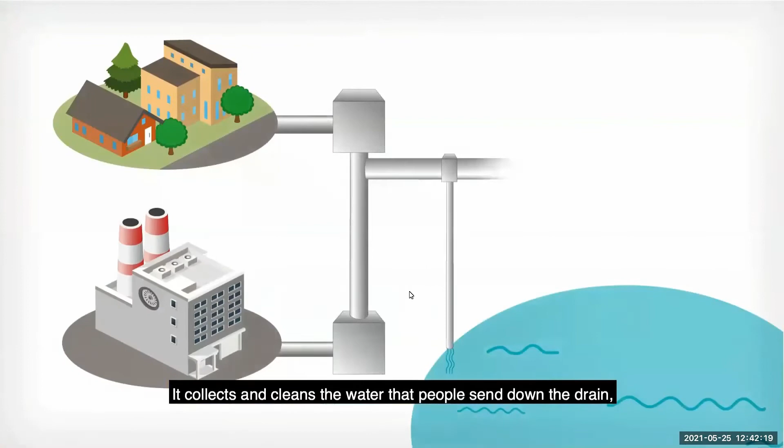Clean water is what makes the Northwest special. Puget Sound and our lakes, rivers, and streams give us food, transportation, jobs, and fun. Why should you care about wastewater in our region? King County's wastewater system is vital to our community. It collects and cleans the water that people send down the drain and protects public health in our rivers, lakes, and Puget Sound. The Clean Water Plan will guide King County investments that protect our waterways, the environment, and public health for decades to come.

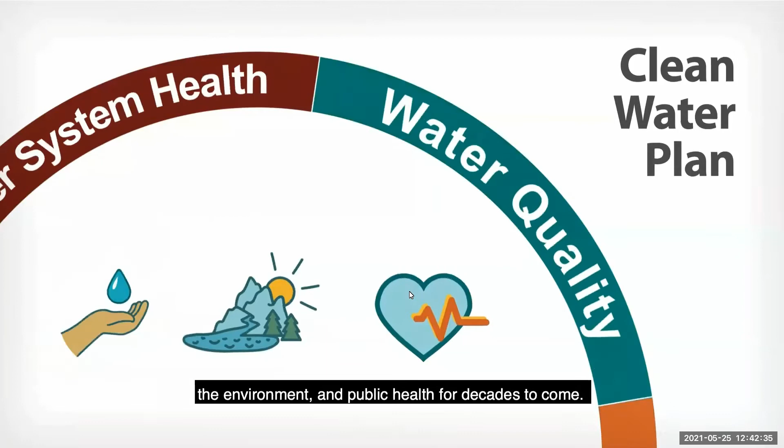King County has tough decisions to make about the future of our regional wastewater system. We need to plan for current and proposed regulations, fixing aging pipes, pumps, and tanks, population growth, and how to pay for the investments which will cost billions of dollars in the coming decades. While doing this, we need to keep other important issues like equity and social justice, our future climate, and costs in mind. And your voice matters. The Clean Water Plan process will allow us to thoughtfully navigate the different choices and opportunities so we make the right investments at the right time for public health and the region's rivers, lakes, and Puget Sound going forward.

Here's how the planning process works and how you can make your voice heard about the issues that matter to you. First, we look at different choices and opportunities that need attention across our wastewater system. Things like how we move wastewater to the treatment plants, how we clean it when it gets there, how we manage extra water during wet weather, how we care for our aging system, how we recycle treated wastewater, how we clean up historical pollution, and keep new pollutants out of our wastewater.

To build the Clean Water Plan, we are exploring a range of actions to address our wastewater and water quality challenges. Actions are the moldable building blocks that will be shaped and combined through the planning process. Understanding individual actions is a start, but we also need to look at how they interact over time and how they affect water quality. The next step in the Clean Water Plan process is to put individual actions together into strategies, which are different complete approaches to investing in water quality and our regional wastewater system. We developed several strategies that will help us explore the choices, opportunities, challenges, and results of each approach.

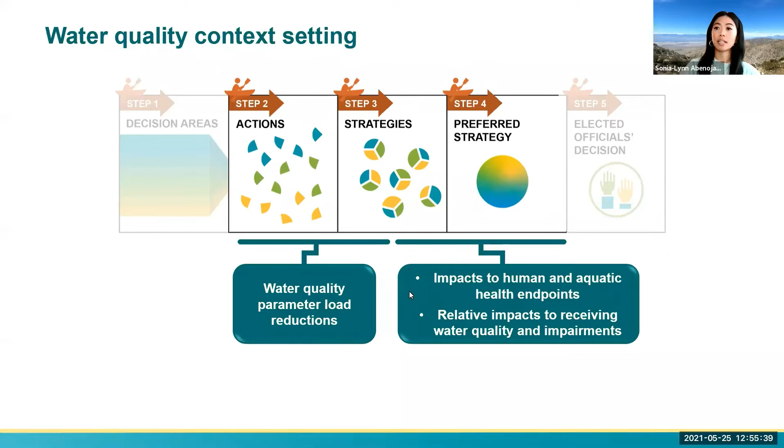In future phases of the Clean Water Plan process, we'll put together individual actions into complete strategies, and at that point we'll be able to explore the broader impact that the strategies have on water quality, which includes benefits to salmon, people, and orcas.

This brings us to our next topic, which is how water quality parameter loads are estimated for the plan. Estimates of water quality parameter load reductions were determined by developing estimates of concentration and flow rates. For the decision areas we'll be discussing today, which are the wet weather and legacy pollution actions, this included historical data of stormwater and wet weather flows, regional water quality monitoring data, and other available literature.

Based on specific components, activities, or projects within an action, we determined the changed conditions such as changes in populations or removal observed at similar facilities, and we use this to estimate potential change in water quality parameter loads.

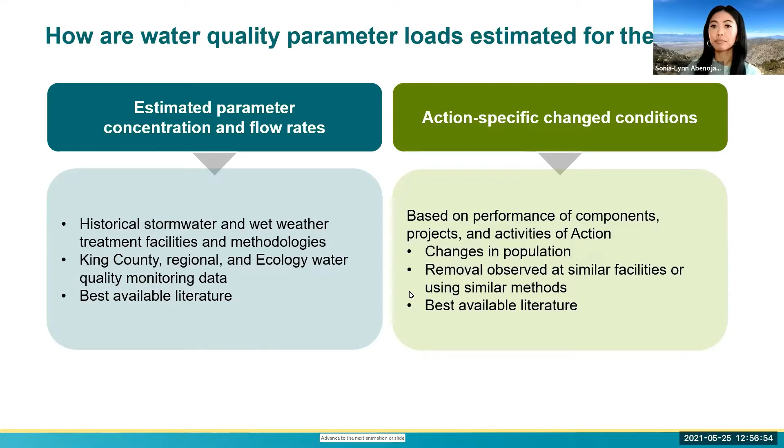Later in this workshop, you'll learn more about the conceptual program planning estimates of each of the actions. But we want to share up front how these estimates of the specific components, projects, or activities of these actions were developed. We used costs from existing King County studies and historical cost revenues, standard labor rates, and information from comparable programs or projects in other areas of the United States.

Estimates that we'll be showing you today are for the full 40-year planning horizon, and they're shown with an accuracy range from the lowest, most optimistic, to plus 150%. These estimates are based on guidance provided by the Association for the Advancement of Cost Engineering. In addition, to account for the uncertainty in the cost estimating of a planning level concept, we also looked at how the scope and details could be impacted over the 40-year planning horizon.

The purpose of these conceptual programs, as I mentioned earlier, is to provide an understanding of the order of magnitude of funding that would be needed for the action if implemented.

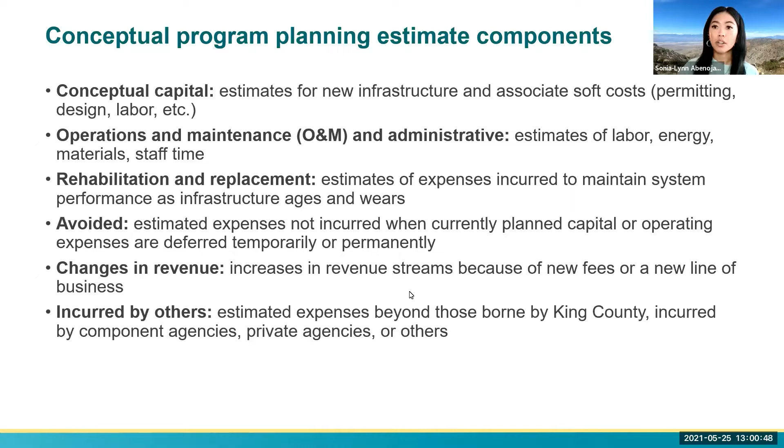All right, so now that I've walked through the background information on the Clean Water Plan and the actions, I'm going to pass it back to Darcy, who will show you where we are on the agenda and pop up another few polls for all of you to participate in. Thank you. Thanks very much, Sonia.

On this slide, you can see that we are moving along through our agenda into our next topic. We'll head next into our presentation on stormwater management key concepts. Next slide.

Next slide. To start this question off, we do have a couple more quick trivia questions for you. To launch this, just for fun, pick the option you think is closest to the correct answer. So approximately how many inches of rain fall on average in King County every year? 24 inches, 39 inches, 41 inches, or 56 inches?

We definitely know we are in a rainy part of the world. Thanks for entering in your guesses. Looks like a little over half of you guessed the right answer. It is 39 inches. All right, thanks.

Okay, next slide. Here's one more quick question to warm us up for the next presentation. Approximately what percent of King County's urban areas is impervious surface, meaning land that is covered by features that cannot absorb water? Is it 21%, 27%, 35%, or 44%?

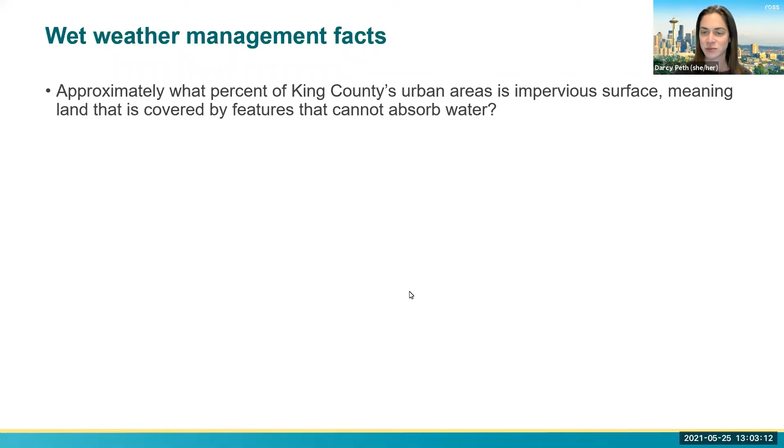Okay, with that, we are now going to go into the presentation. I'll hand it over to Tiffany Knapp. Go ahead, Tiffany. Thank you, Darcy, and good afternoon, everyone. Welcome again, and thank you for your time today and for being here. I am Tiffany Knapp. I am from the King County Wastewater Treatment Division and one of the program managers for the Clean Water Plan.

So to kick off this section, we're going to do a quick grounding on what we're talking about when we say stormwater. We'll start with a short reminder of the hydrologic cycle, or the water cycle. Basically, when precipitation, rain or snow, falls on land, it either falls onto water surfaces, so oceans, rivers, lakes, or it falls onto vegetation, trees, grasses, bushes, and from those it either evaporates or evapotranspirates back into the atmosphere.

Or it can land on ground surfaces where it can evaporate or infiltrate into the ground if the ground is pervious, so the water can actually be absorbed. Or from impervious surfaces, or hard or developed surfaces, rain will run off the surface either directly into water bodies or into a stormwater collection system, which could be pipes or open ditches.

So when we think about water quality, especially in the urban environment, we are most focused on this rainwater runoff that enters into these collection systems. So that's what we'll mostly be talking about today.

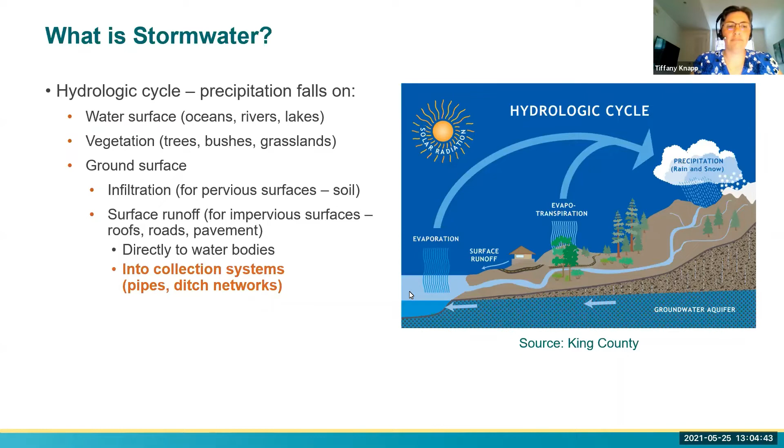So why are we concerned about stormwater in the urban environment? In urban areas, there are more hard impermeable surfaces, as noted in that poll question, which means more stormwater runoff than would naturally occur in those areas. So rather than the water slowing down as it moves through vegetation or being able to infiltrate into the ground, the stormwater runs directly off these hard surfaces and it can cause higher peak flows.

These higher flows can also carry pollutants from the surfaces that they run off to, which includes a wide range of pollutants. So we're thinking of things like solids, metals, oils, bacteria, as well as garbage and other contaminants that might be on roads or pavements that it is running off of.

Also, these high peak flows can damage stream channels as more water gets into the streams faster, causing them to flow faster and more violently. This then can impact habitat within the streams, including habitat that's good for fish spawning, for instance. So this is not just aquatic and environmental impacts, but these higher stormwater flows can also impact people, things such as flooding or other impacts as well.

Each year, King County experiences large volumes of stormwater runoff. Regionally, it's estimated that approximately 146 billion gallons of stormwater runs off the approximately 540 or so square miles of developed land, and that stormwater then enters the region's lakes, rivers, and Puget Sound. Following along on the slide image, some of that 146 billion gallons enters the regional wastewater system, about 12 billion gallons, which is then treated by the wastewater treatment plants. Another 15 or so billion gallons is treated by stormwater-specific treatment facilities, but that leaves approximately 118 billion gallons that drains directly into surface waters with no treatment. To give you a sense of scale, that 118 billion gallons is almost double the amount of flow, wastewater and stormwater, treated each year by King County's regional wastewater facilities.

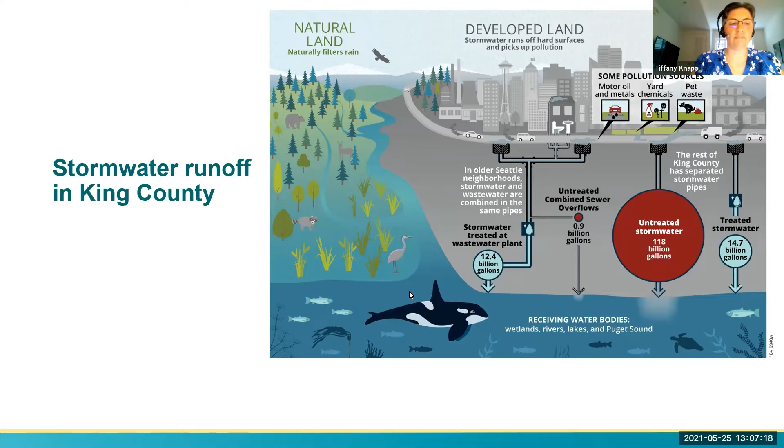Let's break down for a minute what types of systems collect stormwater in the urban environment as it runs off of the roofs and pavements and roads around our region. There are basically 3 different types of collection systems. The first, shown on the slide, is the separated storm system.

This is where there are separate pipe systems for both wastewater and stormwater—one system for wastewater, one system for stormwater. This is most of the urban area of King County. The only area that doesn't have a separated storm system is Seattle. So most of the stormwater, that 118 billion gallons from the previous slide, goes into these separated pipes and ditches and runs directly into surface water. A relatively small amount, the 15 billion gallons on the previous slide, gets treated on site or at a stormwater-specific treatment facility.

In Seattle, there is a combined sewer system where the runoff from stormwater goes into large pipes along with the wastewater. The stormwater mixes with wastewater and travels to one of the regional wastewater treatment plants, primarily to the West Point treatment plant, where it's treated before it is discharged to Puget Sound. These pipes are big enough to carry the stormwater from small and medium and even some big storms, and this accounts for about 12 billion gallons of the stormwater each year.

During very large storms, as Sonia mentioned, in the winter when the combined system gets full, there is a small percentage of the overall flow that overflows into surface waters through combined sewer overflow outfalls. We'll be talking more about our combined system and actions related to it in the next segment today after our first break.

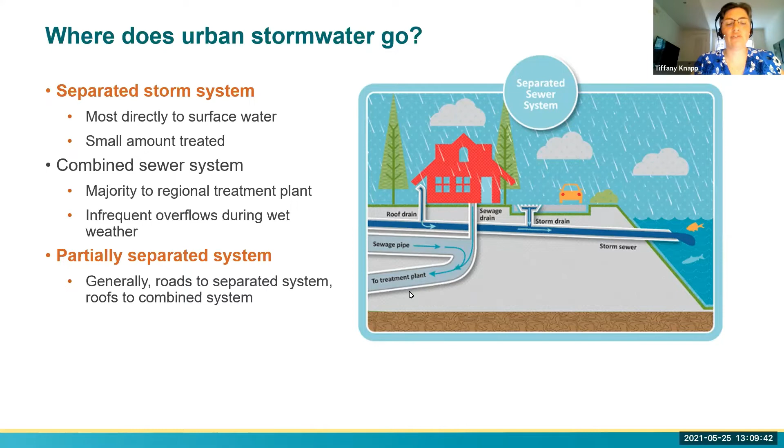There's also some areas that are partially separated, meaning some stormwater goes into stormwater pipes or ditches, and some stormwater goes into the combined system. In these areas, generally the runoff from roads will go into a separated storm system, and the runoff from roofs or parcels and other surfaces goes into the combined system. So when we talk about the Clean Water Plan stormwater management related actions today, we're generally talking about stormwater management in the separated storm systems and in the partially separated systems.

I mentioned a couple times that some stormwater does get treated. So what does that stormwater treatment look like? This slide shows a range of stormwater treatment—these are also the different types of treatment we'll be speaking to within the stormwater management actions.

On the left is smaller scale, tending to be more passive treatment that can be appropriate for more distributed, smaller areas—roadways or right-of-ways, parking strips, homes or individual parcels, parking lots, those types of areas. This includes things like bioretention, stormwater ponds, media filters, rain gardens, and permeable pavement. Often these are called green stormwater infrastructure, or GSI.

The middle picture shows a regional stormwater treatment system that captures and treats a larger volume of stormwater, and these systems can be either passive or active. And then, as I mentioned, a large amount of the stormwater that is treated in the region enters the combined system and then flows to one of the regional wastewater treatment plants. On the right is the West Point treatment plant, located at the tip of the Magnolia neighborhood in Discovery Park in Seattle.

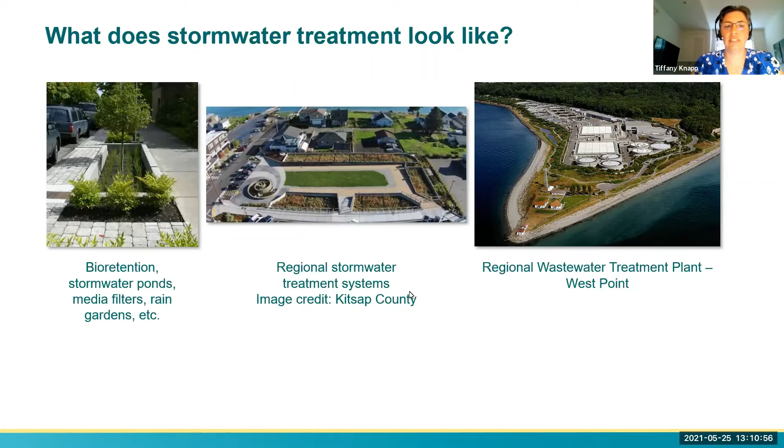In King County, stormwater is managed by multiple jurisdictions, and there are federal and local stormwater regulations that require local governments to reduce the amount of pollution in stormwater, as well as the volume of stormwater.

There are also recent stormwater codes that require stormwater management for new and redeveloped construction. For example, the image on the right shows green stormwater infrastructure for a newly constructed multi-family housing unit. These newer codes only require stormwater facilities for new and redeveloped areas, not for older buildings or areas developed prior to when the codes were initiated.

In urban areas, cities are responsible for stormwater management within their boundaries, and King County operates stormwater management infrastructure and programs for unincorporated areas of the county.

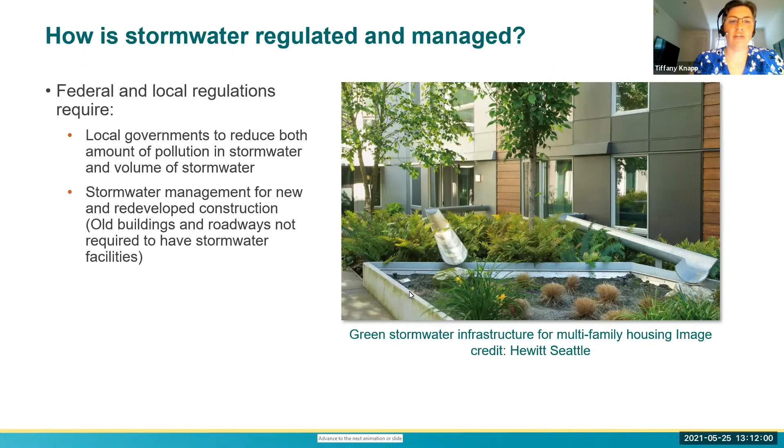So why is the Clean Water Plan exploring wet weather management and specifically stormwater management related actions? The next slide gives us a sense of that exploration. Overall, when looking at what approach should be taken to address wet weather in King County's system, we're also considering whether there are new or alternate approaches to wet weather management.

Should these be considered in certain areas, for instance? This could include how more polluted stormwater could be treated through both existing and new approaches and tools, including gray infrastructure as well as green infrastructure.

We're also exploring whether there are opportunities for and the ability of the wastewater system to treat more polluted stormwater. And since we know stormwater is a major source of pollution in the region's water bodies, we're exploring if there are opportunities for better water quality outcomes.

Related to this, we know that many older buildings and roadways were constructed prior to the current stormwater requirements, and that they lack sufficient stormwater facilities. We also know that stormwater is a major source of pollution in the region's lakes, rivers, and Puget Sound.

Also, existing stormwater regulatory mechanisms and codes will likely result in incremental stormwater management improvements that occur over a longer period of time. And we also know that stormwater flows and watersheds don't follow city or jurisdictional boundaries.

So there is some coordination between stormwater management agencies that exist, but there are also likely more opportunities for partnerships and coordination.

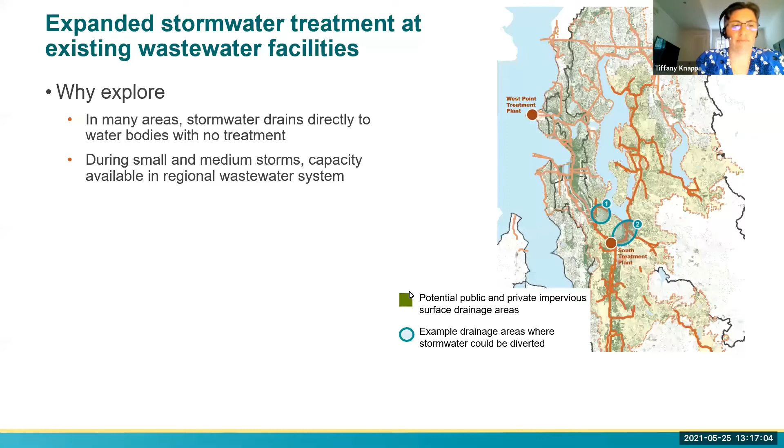This action gives you a sense of what this would look like. We would connect the separated stormwater systems to the regional wastewater system during small storm events, then stop that diversion during higher peak flow periods when capacity is needed for wastewater flows. This would target areas with separated stormwater collection where stormwater is not currently treated, and where those systems are close enough to existing county regional wastewater pipes or infrastructure so that not a lot of new infrastructure would need to be built.

The map on the right shows one of the example areas. In this figure, several areas are shown, some that currently have stormwater draining to Lake Washington, shown in yellow, and others where stormwater drains to the Duwamish River, shown in green. Again, all of those areas are currently without treatment.

The blue dots show potential interface points between the existing stormwater system and where we could potentially divert to the wastewater system. This action would consider where capacity is needed in the King County wastewater system for larger storms, and include gates or valves that shut off stormwater diversion when the wastewater pipes are filled. We estimate, as an example, that approximately the 90th percentile stormwater flow event in these areas could be managed this way, which roughly corresponds to a storm producing about 1.5 inches of rain in a 24-hour period.

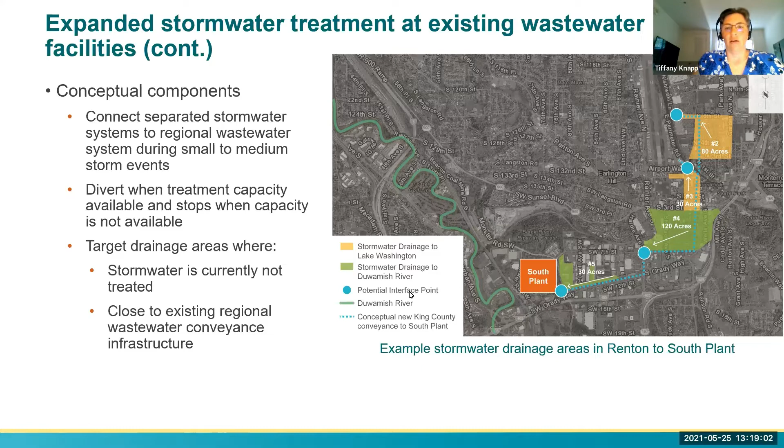Looking at the characterization of this action, we have information on water quality. We see a reduction in stormwater flows, and since there's a wide range of pollutants in stormwater, we see a reduction in pollutants as well. It also shifts any resulting loads from the Duwamish or Lake Washington to Puget Sound instead, since the flow now goes through the regional wastewater plant and the treated effluent is discharged directly to Puget Sound.

The conceptual program developed for this action results in about $210 to $530 million for capital infrastructure to connect the systems, plus an additional $20 to $50 million for administrative and operation and maintenance over the 40-year planning horizon. This action is somewhat scalable, and there may be other areas of the regional wastewater system with some capacity during small and medium-sized storm events. However, there's a practical limitation to how much we could scale this up, given the size of existing wastewater pipes and capacity available at the treatment plants.

We would need to study this further and identify and confirm specific project locations that would make the most sense if this action were implemented. Once again, this concept uses capacity that's available when not needed elsewhere—we're not planning on expanding pipes or treatment plants to treat more stormwater, but really taking advantage of available capacity. Finally, there are also opportunities for partnerships and collaboration between jurisdictions for both implementation and potentially cost sharing with this action.

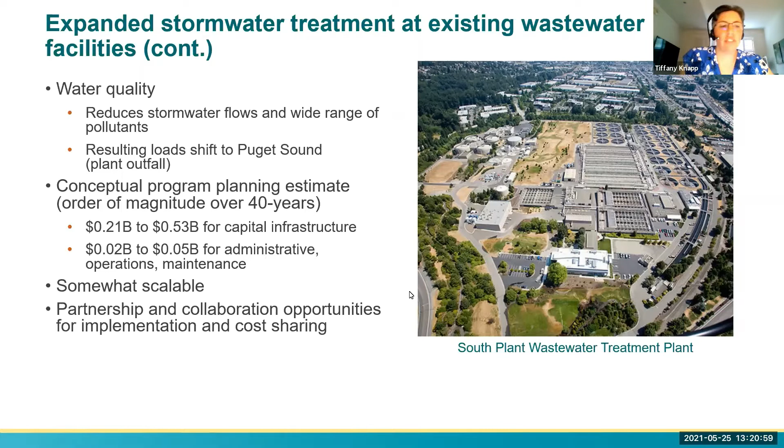So our second action is the Regional Stormwater Facilities Program. This action looks to address stormwater that's not currently treated, and it explores leaning into more distributed stormwater treatment infrastructure, which we know has the potential to reduce pollutants. This action includes new stormwater management infrastructure in areas that currently lack stormwater management and treatment, and would include regional stormwater facilities and green stormwater infrastructure, focused on public land or the right-of-way.

So the figure to the right shows some of the potential example areas considered for this action. Regional stormwater facilities are the blue circles, and more distributed green stormwater infrastructure, GSI, and retrofits are the orange circles.

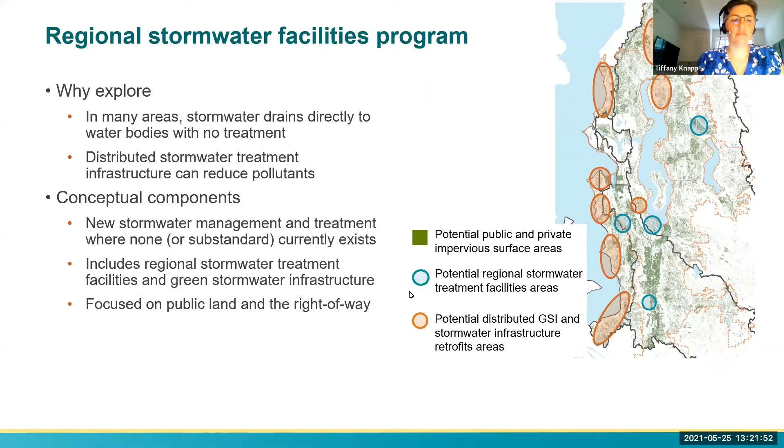From a water quality perspective, this action reduces stormwater flows and a wide range of pollutants by 50% or more. For example, depending on the specific stormwater controls and treatment used, up to 90% of solids and toxics could be removed before they enter water bodies, or up to 70% of metals and bacteria. Pollutant reduction here accounts for both flow and volume reduction.

One of the things about this action is it's scalable and could be geographically flexible in where it's applied. This could allow for targeted programs to specific water bodies, specific ecological outcomes, or incorporating equity considerations about where to apply the action. Partnerships and collaboration would be important for implementation, and there are opportunities for cost sharing with this action.

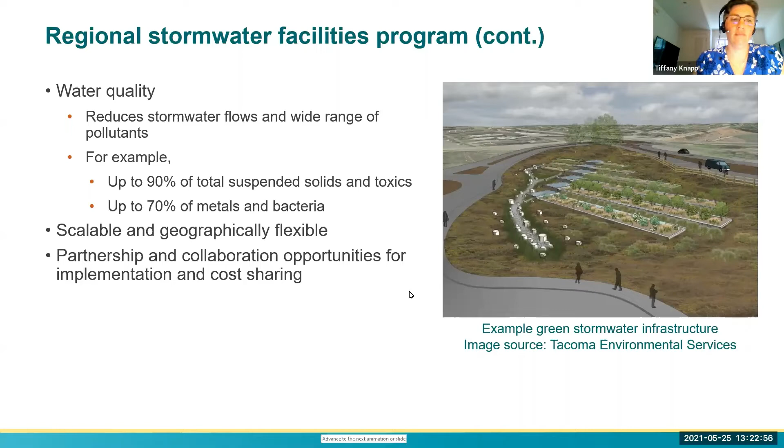The third action within these stormwater related actions looks at where stormwater flows into regional water bodies without treatment, where there's currently no requirement for adding stormwater facilities. It also explores managing that stormwater closer to the source. This action focused on areas developed before the recent stormwater codes and would provide an incentive program for stormwater retrofits on private property, like rain gardens, bioretention, permeable pavement, cisterns, and similar tools.

In this case, construction and maintenance would be the responsibility of the property owner, but they'd be provided a financial incentive to install these retrofits. This would help manage stormwater at its source and create partnerships with property owners for installation and maintenance of smaller scale stormwater management. The map shows in green broadly the areas that would be technically feasible, though specific project locations would depend on the voluntary nature of which property owners decide to participate in this incentive program.

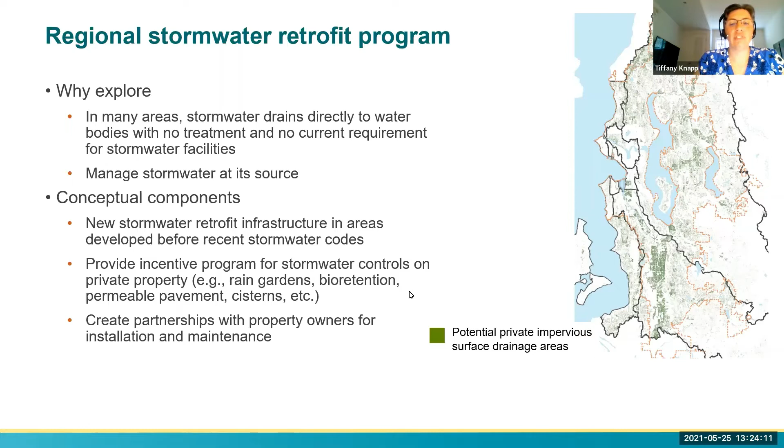From a water quality perspective, this action is similar to the previous one. It does reduce stormwater flows and a wide range of pollutants. For example, depending on the stormwater controls and treatment, around 90% of solids or toxics are removed before entering water bodies, or up to 70% of metals and bacteria.

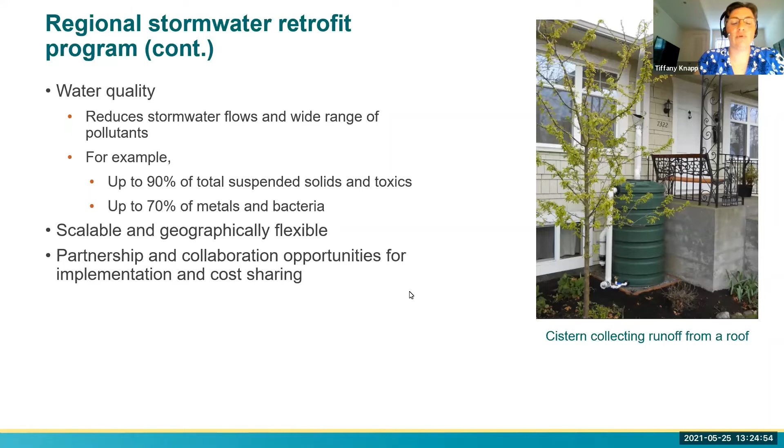Implementation of this program is also very scalable and geographically flexible, again targeted to specific water bodies, ecological outcomes, or equity considerations. Partnerships and collaboration would be very important for implementation, and there are also opportunities for cost sharing.

So those are the 3 stormwater management related actions. Just to offer some overall takeaways: stormwater is a major source of pollution to the region's lakes, rivers, and Puget Sound, and we know that stormwater management options are able to reduce a wide range of pollutants and volume of stormwater. Stormwater actions also tend to be very versatile, and they can be implemented at different scales, in different areas, and on shorter or longer timelines. This really does offer geographical flexibility that allows for the potential to target specific water bodies or specific ecological outcomes, as well as to consider equity in where these programs are implemented.

Speaking of equity, as the Clean Water Plan has developed and characterized the actions, we've also looked at where opportunities may exist to incorporate equity. Several examples are on this slide; there are actually more listed, which can be found in section 9.2 of the Actions Characterizing Water Quality Investment Options document. For stormwater management related actions, here are a couple of these equity opportunities.

Equity opportunities might exist to support contracting, priority hire, workforce development, and apprenticeships. For example, workforce development for maintenance of GSI, the green stormwater infrastructure, could target people in priority communities who could participate in county-sponsored training programs. There are currently existing county processes in this area, but with these actions there's an opportunity for new programs and additional resources. It's also an opportunity for equitable service delivery of stormwater treatment that targets priority communities, such as prioritizing future system improvements for specific water bodies in priority areas like the Duwamish Waterway and Green River.

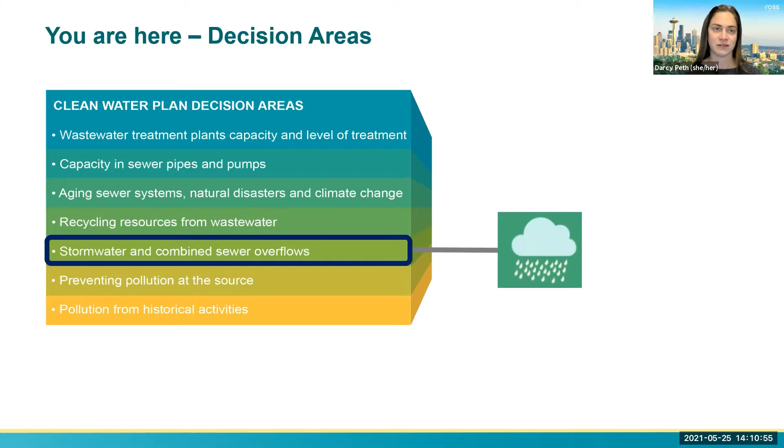Hi, good afternoon again everyone, and thank you for spending your valuable time with us to hear about the Clean Water Plan actions. Our next segment is focused on combined sewer overflows, part of our stormwater and combined sewer overflows segment, which we refer to as our wet weather management decision area.

So we'll do as we've done for other decision areas, start with some concepts first, proceed through those concepts, and then talk about our actions. We've got a few slides here to get us oriented to the combined sewer overflow.

Earlier, Tiffany Knapp went over separated systems and used a similar graphic. So I'll talk about the combined system using a similar graphic here on the left-hand side of your screen. This is a cutaway of a combined sewer system.

You see the house there with a sewage drain going into the pipe, and you see the road there with a storm drain going into a pipe. Those go into a common pipe, so we have a combined sewer system there.

You see that pipe routes to the treatment plant in one direction, and there's also an overflow pipe shown in another direction. If you look closely in the center of the screen, you can see a small bump before that overflow pipe begins to extend out to the waterway. That would be called a weir.

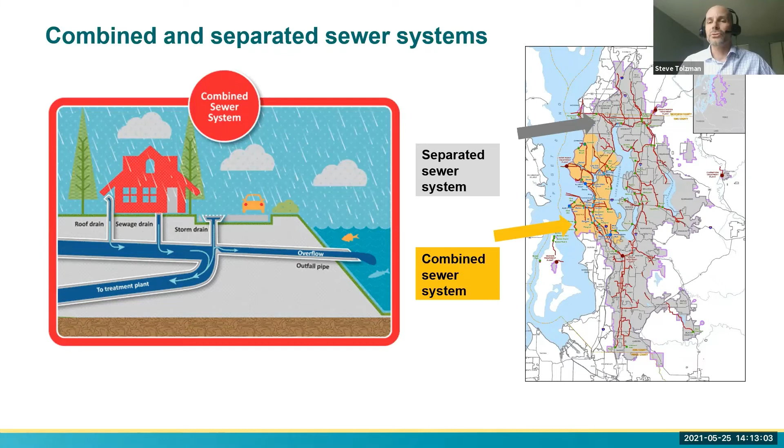Next slide, please. We'll connect up a little bit again with the stormwater presentation that Tiffany just went through and talk some about this same graphic that Tiffany broke down. Tiffany gave a nice overview of this, so I'm going to focus in on the center part of this graphic where the combined system is depicted.

So here you see that cutaway that was just a single structure, kind of close up, and now you see that zoomed out a little bit more. So that center part, you've got the city center area there. You see the building with the pipes connected to the single pipe, and then you see the stormwater from the streets getting into that same single pipe. That's all being routed into the sewer system network.

And you see there a bifurcation, or a split, where some stormwater and wastewater that's mixed is going to treatment. That could be at a regional wastewater treatment plant and secondary treatment, or that could be at a wet weather treatment facility. We'll talk about those more as we get into the presentation.

If the system is not able to accommodate that, and right now it accommodates up to 12.4 billion gallons annually, that's based on mean rainfall or average rainfall per year, that portion that goes untreated is shown there as the 0.9 billion gallons annually. So that center part is the combined system, and that's the focus of these actions we'll be going over next.

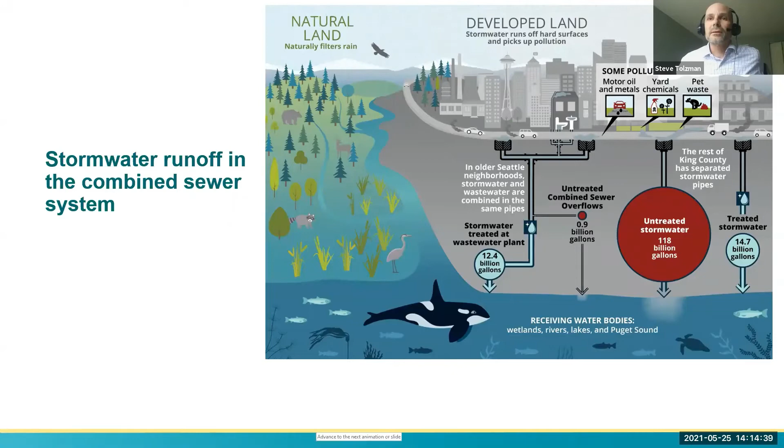Okay, and this other slide tries to just ground us a little bit more in the combined system and how the combined system works from a conceptual and overview perspective. I'd like to start in the upper right-hand corner of this slide where the small cloud is with raindrops falling, and step through this graphic from that point forward.

So the first thing we see there is a bubble that says GSI and pipe separation keep rainwater out before it enters the combined system. Tiffany went over GSI, Green Stormwater Infrastructure, in her presentation. Pipe separation is a concept related to combined sewer overflows.

I've been noting how there's that one set of pipes receiving stormwater from streets and domestic wastewater from homes and businesses. You can actually go through the process of separating those pipes out, building two separate pipes, one for stormwater, one for domestic wastewater, to handle your flows. If you do that, you're keeping it out of the combined system, and GSI can also keep it out of the combined system. If those measures are not taken, let's follow the arrow down.

We enter the large pipe that's in the center of the screen. At the bottom of that, the base, what's labeled base flow, dry weather flow - that is the wastewater, the sewage from homes and businesses coming into the wastewater system on a daily basis, from residents and employees of buildings in our region. So you have that in there.

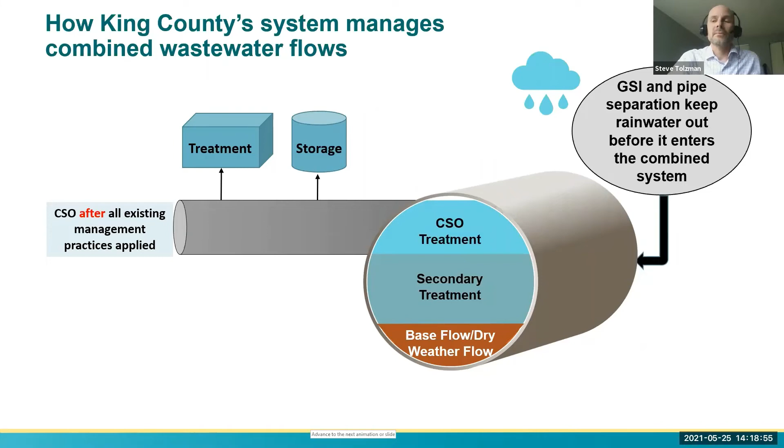With that grounding in CSOs, let's move to a little bit about the regional wastewater system and the status of King County CSOs. Those CSO locations are shown in the map on the right-hand side of the screen. Hopefully you can read that color coding. We're going to use that color coding as well as the list on the left-hand side of the screen to break down what the status of these 39 CSOs are.

There are 19 of them that are considered controlled. Controlled was in our questions at the beginning of this, and everybody did a fabulous job answering that question, so it sounds like the group here is very astute to what the definition of controlled is. But again, that's no more than one event per year, per location, on a 20-year rolling average going forward - it has to maintain that over time. So 19 of these are considered controlled.

There are 4 CSOs that are to be controlled under active projects - active projects meaning projects in construction, and these projects are well into construction. The City of Seattle and King County are partnering on the Ship Canal Water Quality Project tunnel, a large storage tunnel that follows the Lake Washington Ship Canal.

So think about the Fremont area generally, the Fremont area of Seattle. And then there's the Georgetown Wet Weather Treatment Station that's in South Seattle that King County has under construction now. There are 7 CSOs under monitoring for supplemental compliance.

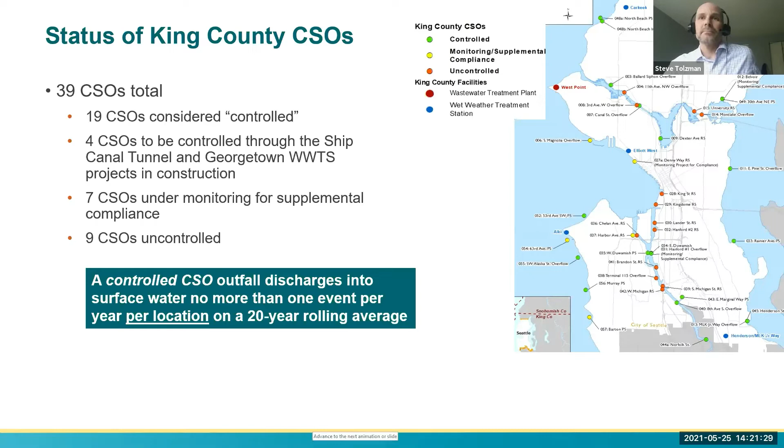All right, and to talk a little bit about the King County Wastewater Treatment Division's planning and ongoing activities related to combined sewer overflows. King County has had a combined sewer overflow control program for decades and been working to address these CSOs for decades. The last update of the CSO plan was 2012, and there was a refresh of that done in 2018. And that plan really is guiding us to meet the regulatory requirements as they currently are for CSOs.

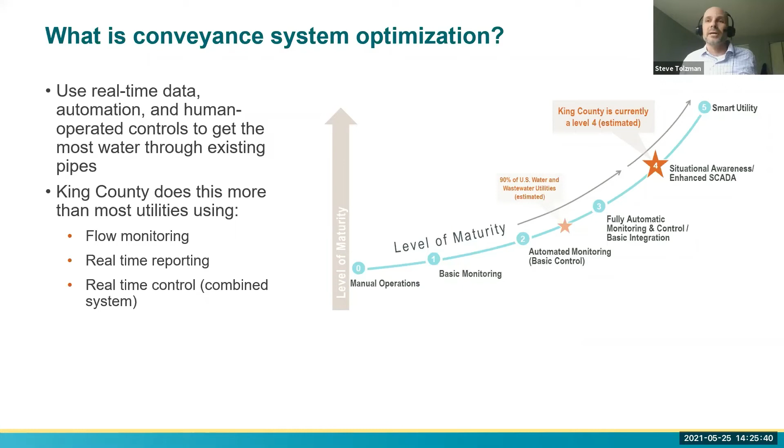Okay, so as we work towards reviewing our actions, a couple of things to get us oriented further. This is an exploration of the opportunities to reduce the CSO events that occur. It's very much why this is included in the Clean Water Plan.

We've noted the regulatory requirements and compliance with those, again very much why it's included in the Clean Water Plan. We also want to see the opportunities for greater effectiveness and better water quality as we work this together into our actions and then into our strategies phase. And then just opportunities to reduce the overall flow per year from the CSO outfalls.

A couple things we take into this conversation we're seeing today. We do know that the CSO projects are large in size, very large infrastructure projects, and they are taking long project durations, and that is a challenge, specifically for meeting regulatory deadlines.

We'll talk about this more related to the actions, but climate change impacts have already caused challenges with complying with the one event per year rolling average. Specifically, changes in precipitation patterns have made it more difficult to model and predict future precipitation and how these facilities need to be designed and constructed to accommodate that.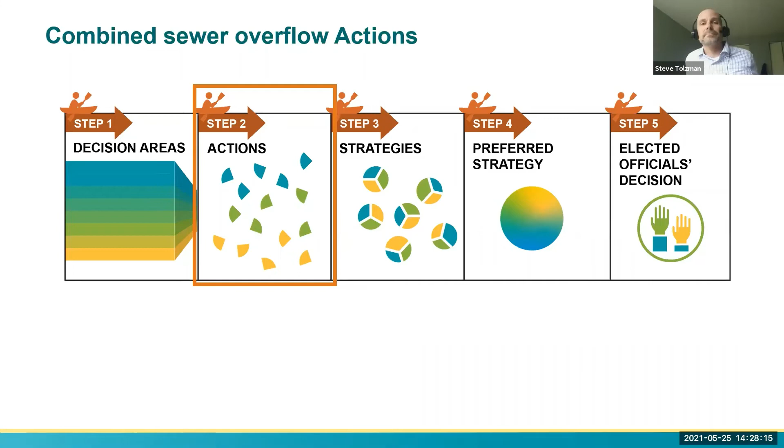Final reminder slide before we get into it: we're talking stormwater and combined sewer overflows associated with our wet weather management workshop today.

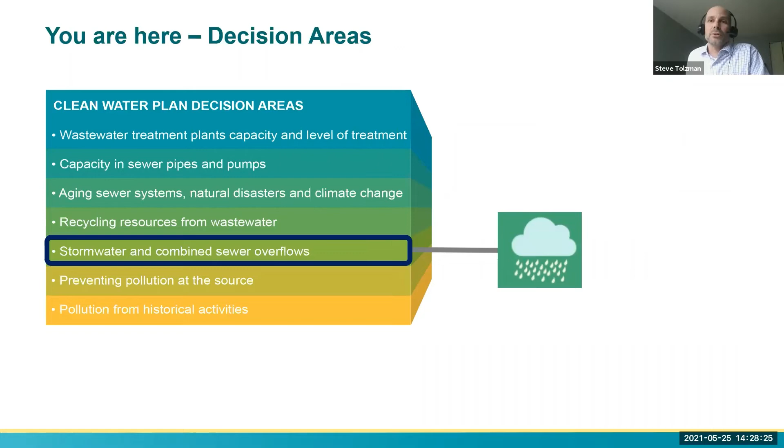All right, so for CSO program actions, we have 3 to go over today. We have a CSO control program, that's the current long-term control program implementation. The Clean Water Plan also brings into the conversation an extended CSO control implementation. And we have a control system capacity optimization action that we'll go over today as well.

I'll note in the blue box here on this slide the actions that we'll present summary information on today. There's a more detailed write-up in the actions characterizing water quality investment options document available on our website.

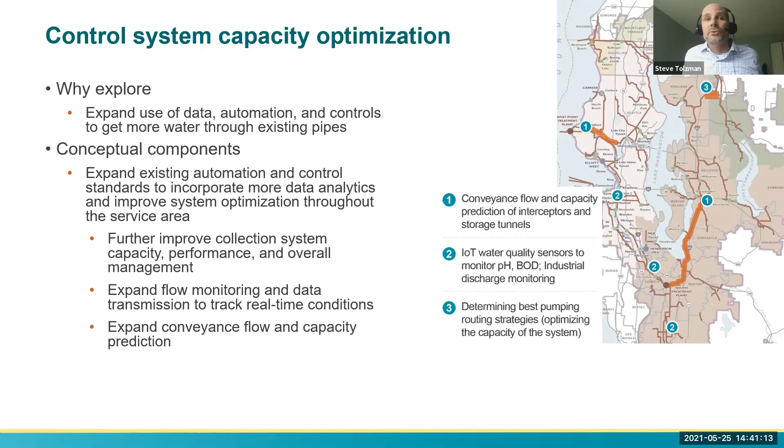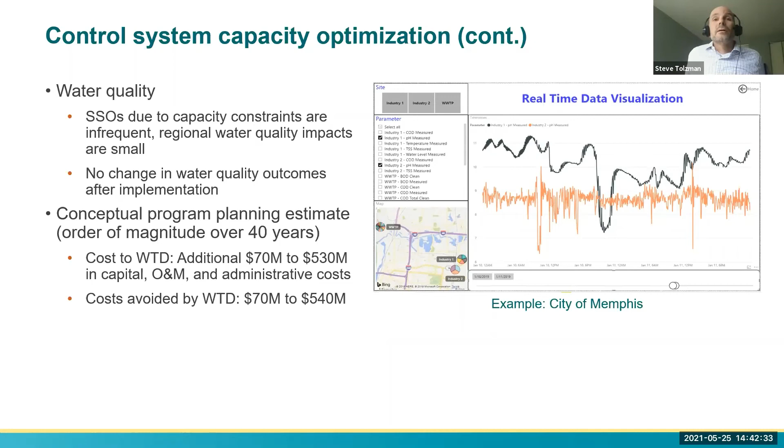So a few takeaways here. These are all themes that have been brought out as we've stepped through this. The CSO projects are large-scale infrastructure projects, and typically what King County, and I think other public sector agencies, are seeing is that these projects require about 8 to 10 years to complete. That's a big takeaway for us.

The climate change aspect I've brought up a couple times is proving to be a challenge with respect to bringing CSOs under control and meeting that control standard. We certainly want to acknowledge that coordination with other agencies is beneficial in this type of work and very important. We also acknowledge that coordination with regulatory agencies, and finally coordination with private property owners if projects go to implementation, is also critical for the success of these projects.

We have a list here of opportunities to promote equity in the CSO program. Let's go through the list and talk about some groupings. Looking at the first two, those are activities King County has in place currently and has a strong desire to continue building on, involving how these projects are delivered and helping to connect ESJ populations and minority and small businesses with our contracting and delivery of these projects.

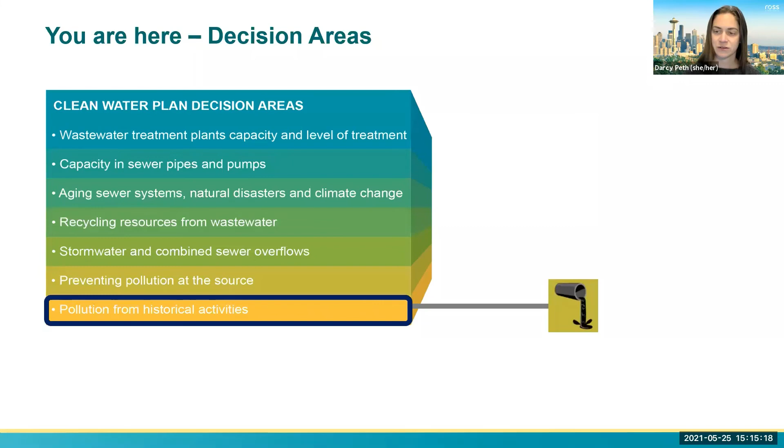Okay, looks like a clear majority thought that the answer is sediment aeration, and you are correct. All right, thanks for playing along on those. And I will now go ahead and hand it over to Patrick Weber for our next presentations.

Thanks, Darcy. I'm Patrick Weber with Brown and Caldwell. I'm part of the technical team supporting King County on the Clean Water Plan, and I'll be talking about legacy pollution, starting with some key concepts. Next slide.

Once in the environment, pollution can stay around for a long time, and legacy pollution refers to pollution that's resulted from historical sources of contamination and remains in the environment. Examples of historical sources are contaminated runoff from an old industry that has since left the area, and ongoing leaching of pollutants from historical structures like the piles shown in this photo. Legacy pollutants can move in the environment, including accumulating in sediment or leaching into water bodies.

Sources vary for the key pollutants that we're exploring. For example, automobiles can release heavy metals such as copper and zinc, as well as oils, including compounds like polycyclic aromatic hydrocarbons, or PAHs, which we'll refer to throughout this presentation. Other chemicals can come from industrial discharges that took place years ago, like polychlorinated biphenyls or PCBs, another compound we'll refer to again, or from yards and streets where people use chemicals like pesticides and fertilizers.

Some pollutants found in sediment can date back to times when there wasn't wastewater treatment or containment of polluted discharges. Others are in the air and dust that get deposited on the ground or washed into waterways. In general, the pollutants come from all of us and all of our activities, and each person can contribute to pollution found in sediments by many of the common things we do every day. Next slide.

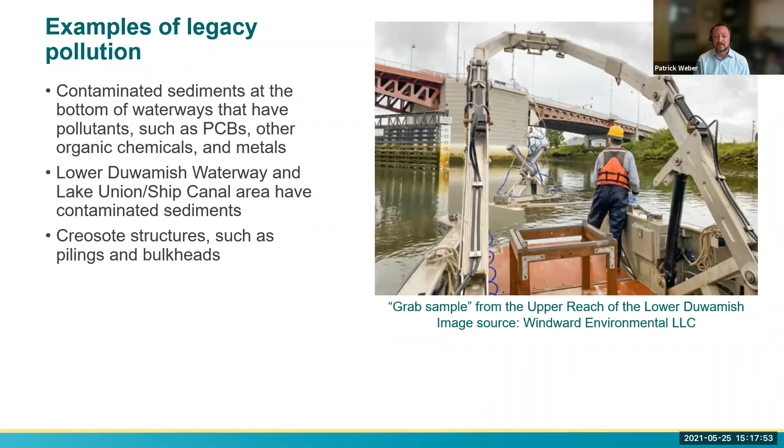Water bodies that have been identified to have contaminated sediments include the lower Duwamish Waterway, Lake Union, the Ship Canal, and others. Creosote structures such as pilings and bulkheads are another regional example of legacy pollution that the plan is considering. Next slide.

Legacy pollution is a broad topic, and there are a lot of applicable regulations, but some key regulations focused on contaminated sediment are shown here. Regulation of contaminated sediments in Washington State falls under the authority of the Department of Ecology, and which regulations may apply can depend on the location and type of sources of pollution identified. To meet these regulations, King County has developed and implemented a series of plans, most recently the 2018 Sediment Management Plan update. The King County Code also includes policies that guide the county in addressing legacy pollution.

So why is the Clean Water Plan exploring legacy pollution control? The county is exploring what opportunities might exist to address legacy pollution and whether priority areas could be addressed sooner to improve habitat and water quality outcomes for communities that have been disproportionately affected by pollution.

In terms of the current landscape for legacy pollution, we observe that persistent contaminants like PCBs, PAHs, and metals continue to pose a potential risk to aquatic life and human health. Sediment monitoring and cleanups are underway in certain places to remove contaminants from sediment. Pollution source control activities like industrial pretreatment are often sufficient to allow for a sediment cleanup to proceed without the risk of recontamination. And pollutants from historical sources may continue to be released into the environment until the sources and pathways are removed or isolated.

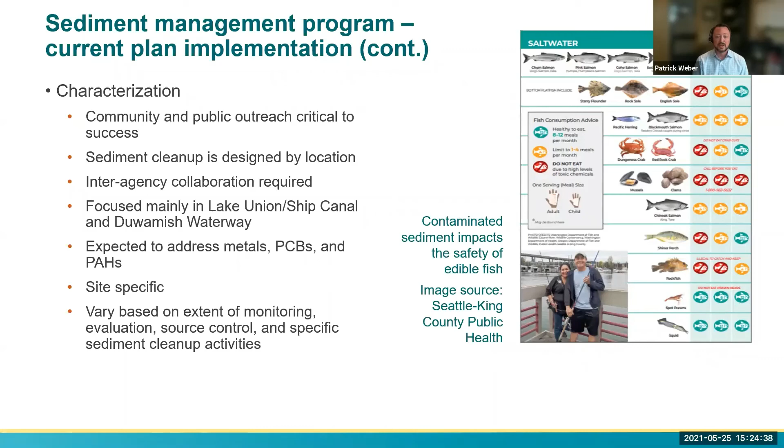Note that for legacy pollution actions, including this one, conceptual program planning estimates for water quality and cost have not been developed as they have been for other decision areas.

The second legacy pollution action is the Accelerated Sediment Management Program, which would implement the same set of cleanup activities as described in the previous action for the existing sediment management program, but accelerate the timing of some of those activities by up to a decade.

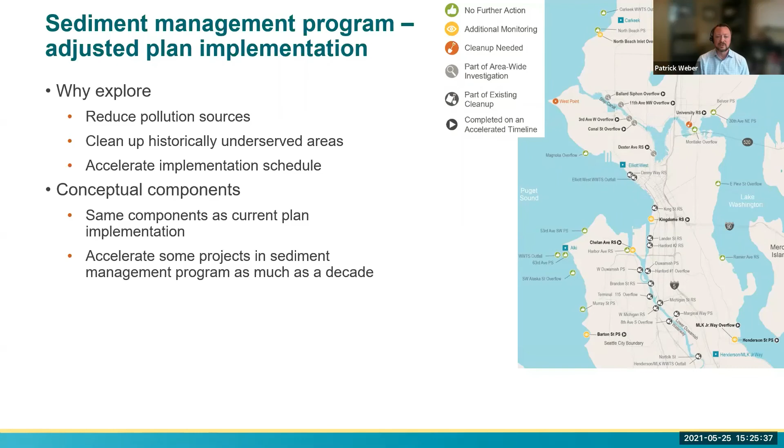For the most part, existing cleanup activities that are underway will continue on their current timeline, such as those in the lower Duwamish Waterway, East Waterway, King Street, and Denny Way cleanups, while most other monitoring, investigation, and cleanup locations will be completed on an accelerated timeline, as indicated by this slightly different graphic with a black circle with a forward arrow. It looks like a play button for areas that would be accelerated. This graphic is also included in the companion actions document for those that want to zoom in.

In terms of duration, sediment cleanup projects have a long life cycle with investigation, planning, implementation, and follow-up monitoring taking place typically over decades. So even with acceleration, this program will take a while to implement. And in terms of water quality, the water bodies affected and pollutants managed are the same as for the existing program, but with the pollutant reductions occurring sooner.

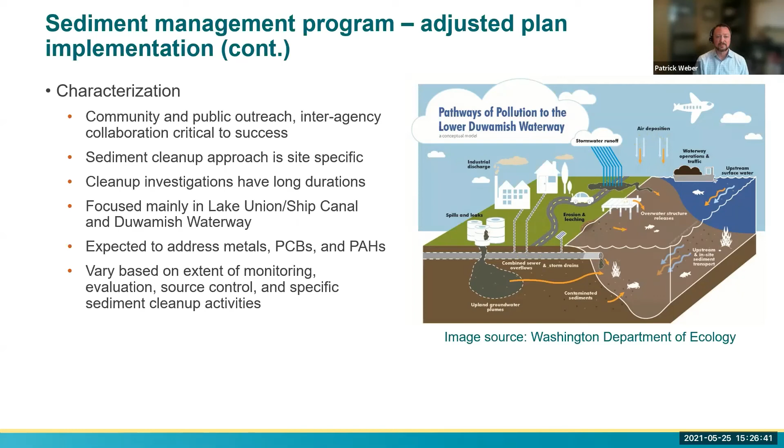The third legacy pollution action being explored is expanded sediment remediation and additional cleanup. This action is actually a legacy pollution mitigation concept that is independent of the county sediment management plan activities and could be pursued in addition to either of the other first two. The action has two main components that are each targeting a specific pathway for pollution.

The first component is removal or remediation of creosote treated wood structures, starting with derelict piles in marine and freshwater bodies. This is intended to address a key regional source of PAHs, which leach directly from the creosote into surface water, and these piles are one of the major sources to surface water for that pollutant.

The second component is cleaning of sewer and stormwater pipes to remove sediment that is collected in the pipe systems before it can reach an outfall and become legacy pollution in the sediment below a water body. Sediments in pipes can carry a range of pollutants that can be discharged to the environment at those outfalls and leach out of the sediment, either in the pipes or at the outfalls and into surface water.

So this action would target areas that have higher levels of pollutants like commercial and industrial areas for pipe cleaning, as well as areas where more sediment would be expected to collect based on the hydraulics or the configuration of the systems. The figure on this slide identifies assumed representative areas for creosote treated structure removal, with the focus really being in the lower Duwamish and the Lake Union Ship Canal area.

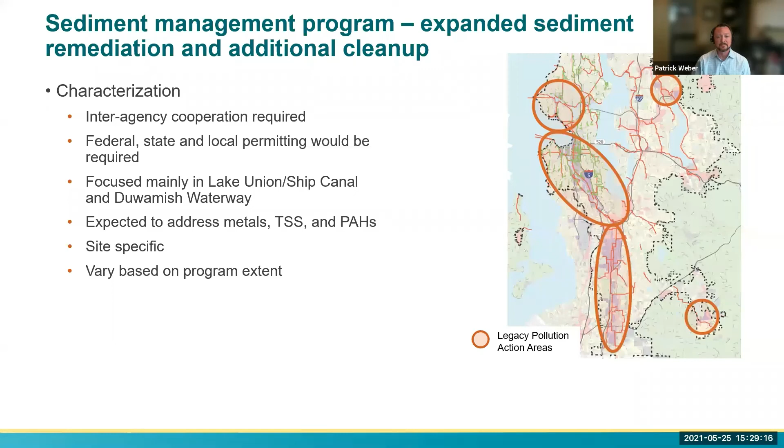So what are some of the key takeaways from the development of legacy pollution actions? The first is that sediment cleanup activities are site-specific with long project durations, and the cleanup is tailored for each location based on a comprehensive investigation of the site, including the extent and type of contamination, human health and environmental risk, sediment characteristics, environmental sensitivity, waves and currents, and other local and specific factors. That sequence of activities takes time to conduct.

A second takeaway is that each of the actions being explored requires partnership and collaboration with other agencies and potentially with private properties. A third is that source control of upstream pollution sources prior to cleanups is important to limit recontamination of sediments following cleanup and to prevent additional legacy pollution from occurring.

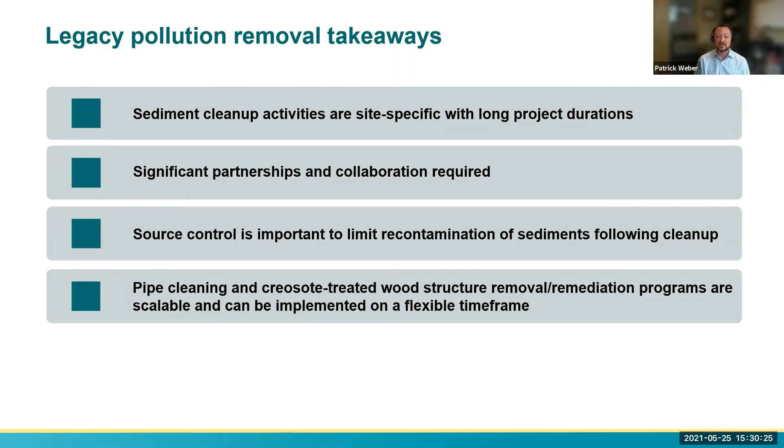And finally, the third independent action we discussed, the pipe cleaning and creosote removal, is flexible and could be initiated at any point in the 40-year planning horizon.

To comment on equity opportunities for priority populations or marginalized communities in addressing legacy pollution: opportunities include strengthening equity considerations for long-term improvements to the natural environment to support environmental justice, providing resource support to community-based organizations to leverage their expertise in advancing equity outcomes, including contracting, priority hire, and workforce development and apprenticeships for priority communities to help build skills to acquire better jobs. And lastly, design and construction of cleanup and pollution reduction activities should be responsive to the interests and priorities of priority communities.

Having talked a lot about legacy pollution, let's step back and look at the context of how the legacy pollution actions being explored could fit in with the other decision areas that have been talked about throughout these three workshops.

So some of the other areas of the plan with a relationship to legacy pollution include connection with wastewater treatment and stormwater decision areas. These actions could augment removal of pollutants in the wastewater or stormwater systems, either before or after standard treatment processes, to help remove those pollutants.

There's an interconnection with conveyance pipe capacity. Pipe cleaning could help free up additional capacity in pipes.

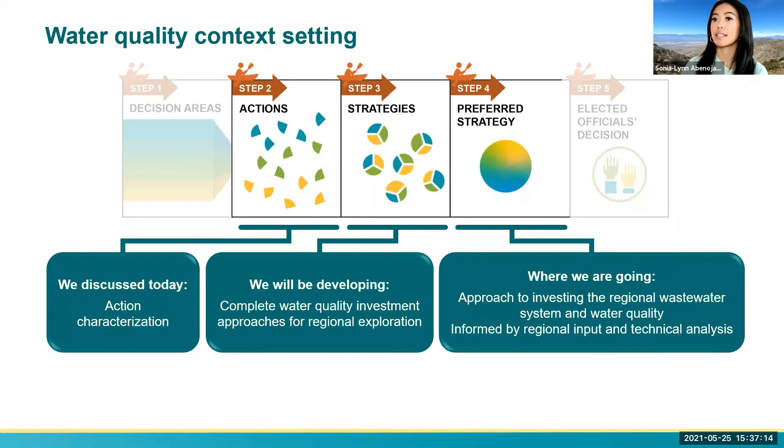Finally, I want to point you to the great resources in our project library, specifically the document we're calling the Actions Characterization Water Quality Investment Options, where you can find more details than what we could share with you today. Feel free to take a look at that.

There are additional resources on the site, including the video we shared at the beginning of this workshop, which is a great introduction to the Clean Water Plan that you can share with your communities and organizations. We also have accompanying topic sheets describing the planning process and what actions are. We welcome you to reach out via email if you have further questions, or visit our website and project library, where we have more information on technical documents as well as engagement resources.